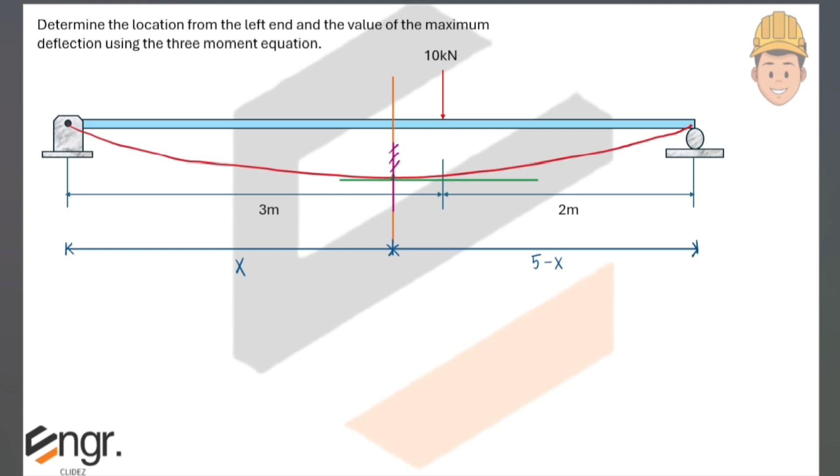So dito tayo sa gitna. Then we will draw our fixed support, sa dalawang sides. So once meron ka ng fixed support dyan, we can now divide the beam into 2. Our first beam is this half. So we will have this figure. Copy ko na lang to, and then yung kalahati lang. Ayan, ito yung resulting figure. Tapos doon naman sa kabila, copy ko lang yan ulit. Ayan, so ito yung figures natin.

And then ano yung ilalagay natin na loads? Di ba alam natin na yung distance na to is equal to x. Then essentially, this is already a cantilever beam. Dalawang cantilever beams, isa para sa left side and isa naman para sa right side. So ano yung magiging loads? Ito, this will be the reaction at the left end. Tapos ito naman yung fixed end. Di ba kapag fixed end, then 3-moment equation, we have to draw our imaginary span.

So we will establish our points as the following. Yung location ng hinge support, label natin as point 1. Then yung location ng fixed end is point 2. And the imaginary span is at point 3. Then this side naman, the imaginary span will still be point 3. Tas yung fixed support is point 4. Then the location of the roller support is our 5th point. So dito sa left side, analyze points 1, 2, 3. Then dito naman sa right side, yung points 3, 4, 5 naman. So yung length ng right side is equal to 5 minus x.

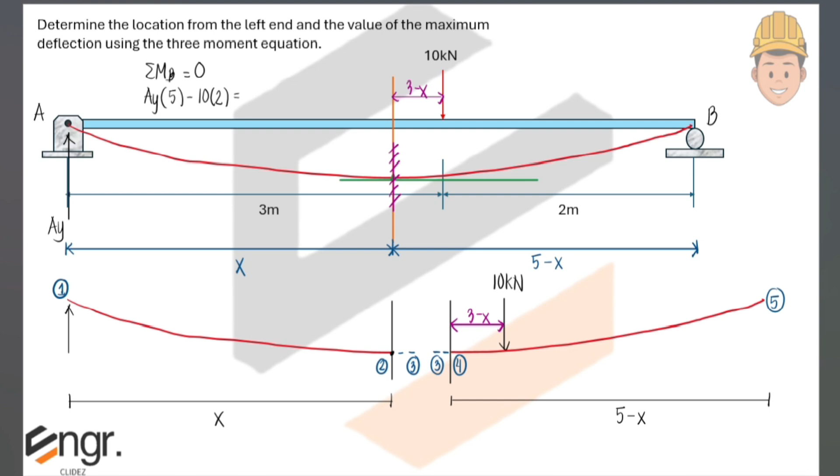So dito sa first figure, we have only this load, and this load comes from the reaction of the hinge support. So kapag isosolve natin yung reaction dyan, we can sum up moments about point B. Sabihin natin ito yung point A, ito naman yung point B. So moment tayo sa B, we have AY times the moment arm, 5 meters, tapos minus 10 times the moment arm ng 10 kN patungo sa point B, which is 2 meters, equate to 0. So AY is equal to 4 kilonewtons. So dun sa kabila, BY equals 6, from 10 minus 4.

So lagay natin yung load, we have 4 kilonewtons. Then we will now apply the 3-moment equation. So since ito yung location ng maximum deflection, we can define this vertical distance as the maximum deflection. And I hope agree lang na if we project a line dyan sa free end going to the point of maximum deflection, this distance will be equal to the maximum deflection.

Ayan. Same din doon sa kabila. If we project a line from point 5, then this distance will be equal also to the maximum deflection. Lagay na lang natin sa gitna. So again, this will be equal to the maximum deflection.

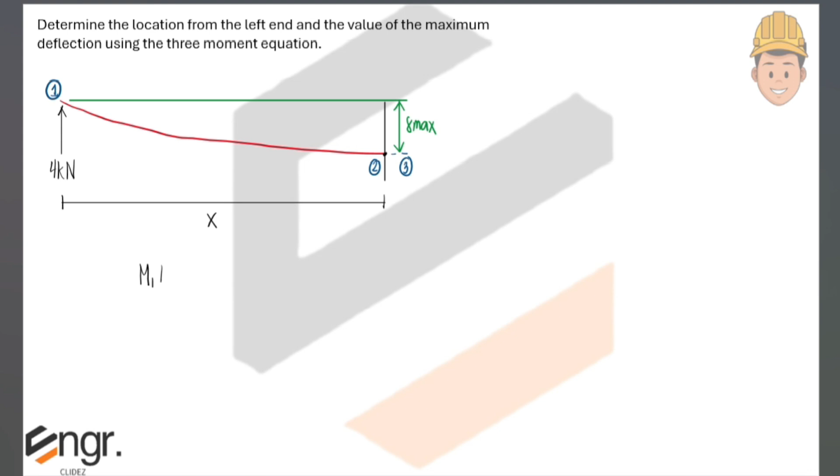Then using the 3-moment equation, we have M1 L1 plus 2M2 (L1 plus L2), then plus M3 L2, for constant EI ito, then plus 6A1 barred a1 divided by L1 plus 6A2 barred b2 divided by L2. Then we equate this to 6EI multiplied by h1 over L1 plus h3 divided by L2.

So let's identify M1. Yung M1 is the free end of the beam, so this will automatically be 0. So magka-cancel na yan. Then our point 2 naman is the moment at the fixed support. So upon establishing equilibrium, if this is 4 kN upward, then dito sa fixed support, we will have a reactive force of 4 kilonewtons. Then ano naman yung moment dyan? Yung moment dyan would be equal to opposite of the moment caused by the 4 kN load.

So 4 kN times x, this will cause a clockwise rotation about the fixed support. So 4 times x, opposite niyan is counterclockwise. Yan yung magiging moment dito. So clockwise moment, opposite of clockwise is counterclockwise. So we have a counterclockwise moment, and the value is equal to 4x.

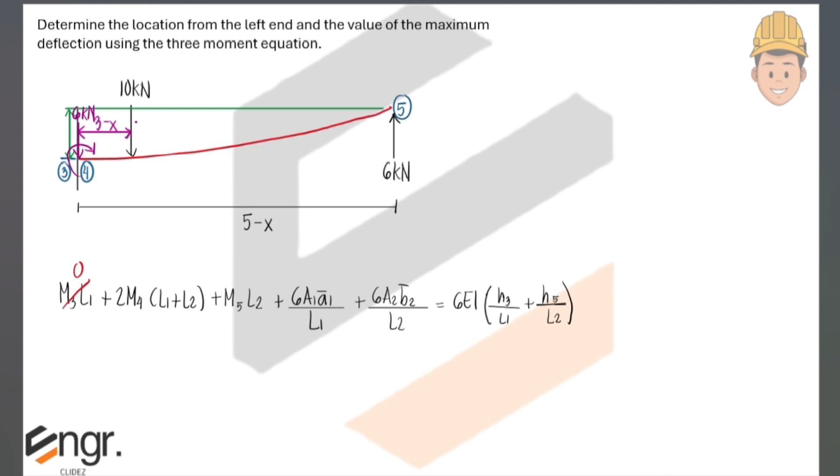Then, this will cause a counterclockwise rotation about this point. So, yung reaction dyan will be clockwise, dito sa left end. So, this will be the value of the load multiplied by the moment arm. So, 6 multiplied by 5 minus X. Then, direction is clockwise. Then, nasa left end yan ng beam.

So, let's check if it follows the positive effect. For the positive effect, the left end moment should be clockwise. Then, this is also clockwise, meaning nasa positive effect siya. So, the sign for M4 will be positive din.

So, paano naman sir if this is counterclockwise? Kapag counterclockwise yan, we follow the negative effect wherein ito yung general figure niya. Counterclockwise moment sa left end and clockwise moment sa right end. If this is the case, then we use a negative sign para sa M.

So again, M4 is 6 multiplied by 5 minus x. Then L1 will be the length of the first span from point 3 to point 4. Imaginary yan, so this will just cancel. Tapos yung L2 naman will be the length of the second span from point 4 to point 5, which is 5 minus x.

Then M5 is located at the free end. So kapag nasa free end yan, the moment will just be equal to 0. So this term will cancel. Then 6A1 a-bar over L1 is located sa imaginary span. So this term will also cancel. Now, from point 4 to point 5, ito yung merong value since merong 6A2 b-bar over L2. So, meron tayong general formula para dyan for point loads.

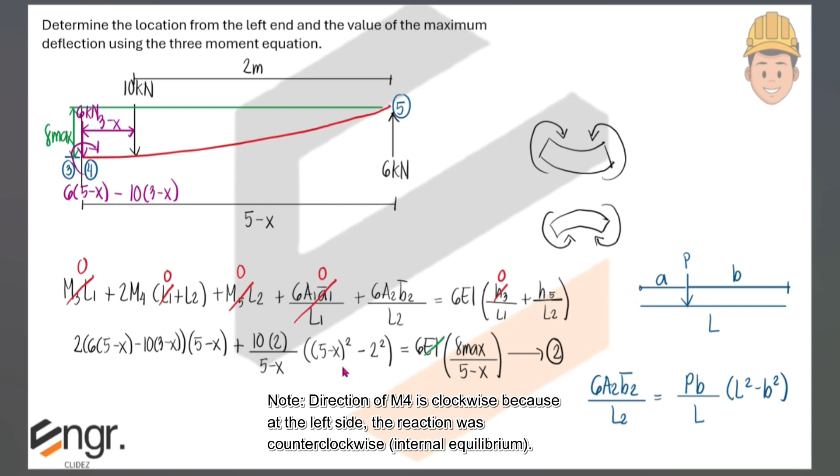So, balik tayo sa first equation natin. So, since alam natin na sa second equation, deflection maximum occurs only sa isang instance, we just need to define the maximum deflection in terms of x. So, 2 times 4 will be 8. Then, x multiplied by x is x squared. Then, we have equals 6. Again, yung EI magka-cancel dyan.

And, it cancels with the second equation. I mean, not necessarily cancel. Tatanggalin ko na lang. But once we solve the equation, we just need to treat EI as constant. So, parang ano lang, 1. So, hindi na natin itatype yan sa calculator. So, 6 multiplied by deflection maximum divided by x.

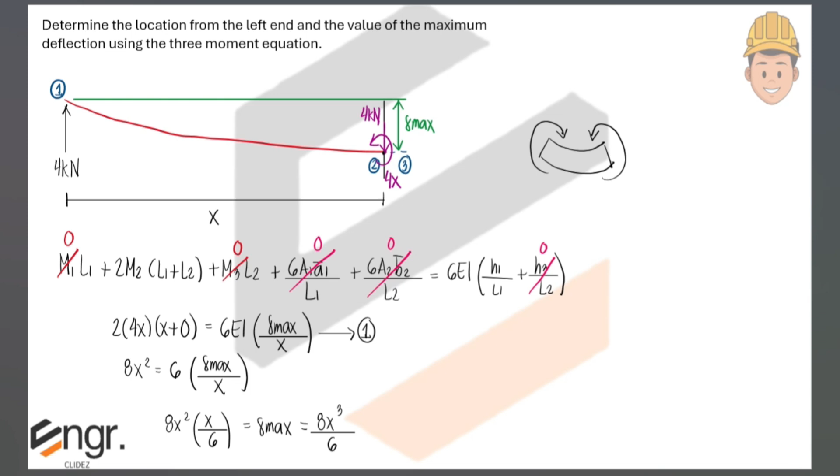Then, multiplying the reciprocal of 6 over x dito sa kabila, we would have 8x squared multiplied by x over 6. So, this is our maximum deflection. If we simplify further, x squared multiplied by x is x cubed. So, 8x cubed divided by 6. Ayan. So, yung gagawin na lang natin ngayon is, ikakopy natin yung equation 2. Then, just replace delta max. So, yung delta max will be equal to this value, 8x cubed over 6.

So, input na lang natin yan sa calculators natin. Ito na yan. And then, once you press shift solve, assume a value na realistic. Since yung assumption natin is, andito siya, just to the left of the 10 kN load, this is 3 meters. Kalahati ng 3 is 1.5. So, yan yung safest guess mo. So for x, 1.5 is our guess value. Then, press equals. We will obtain 2.645751311. So, this is already the location of the maximum deflection.

So, lagay natin x is equal to 2.645751311. Ayan. Meters yan. Location of the maximum deflection. Then, for the value of the maximum deflection, just utilize this equation, yung na-simplify natin sa equation 1, 8x cubed over 6. So, yung x, isa-store ko na lang, shift store, lagay ko sa letter A. So, 8x cubed will be 8A cubed divided by 6.

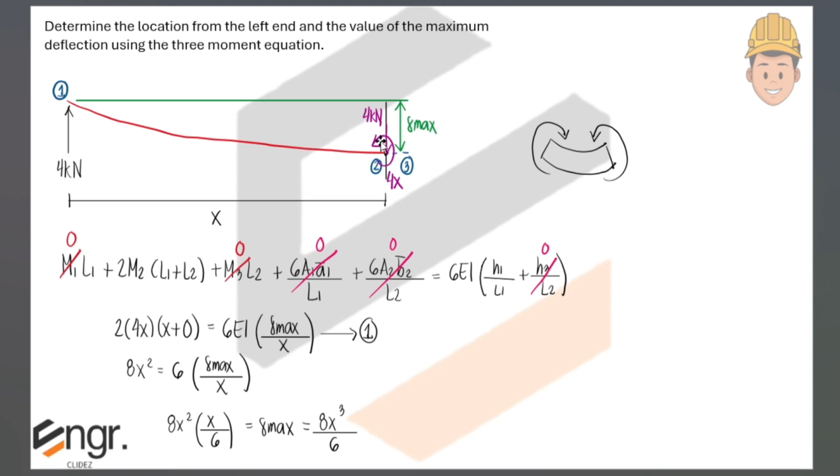Now, itong equation na binuo natin, actually, pinakita ko lang yung M4 in terms of the second figure talaga. But using the concept na yung moment dyan is just same as the internal moment dito sa left side, and we know M2 is equal to 4x, we can also assume na itong value ng M4 is 4x din. 4x yung M2 at the fixed support, diba? Same location yan. So, dito sa second equation, instead of writing M4 as this long expression, we can just use 4x.

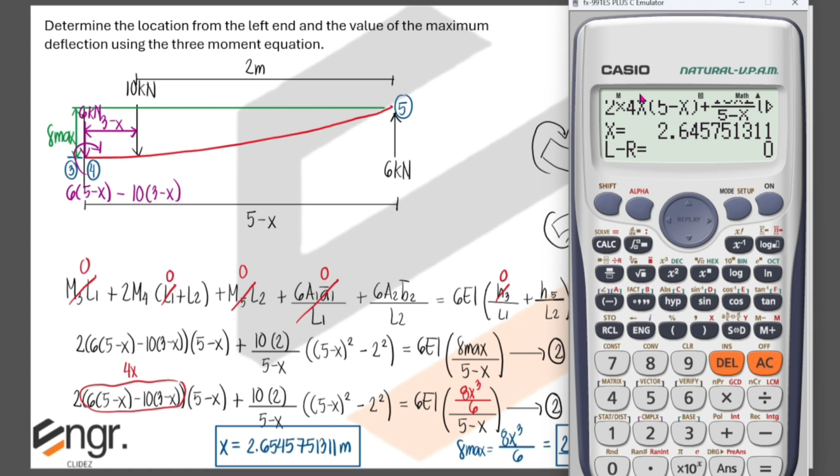So, hindi ko na lang i-demonstrate ulit. Tinype ko na lang sa calculator. Ito. Instead of writing 6 multiplied by 5 minus x minus 10 multiplied by 3 minus x, this will just simplify into 4x. So, if you will input 2 multiplied by 4x, then multiplied by 5 minus x, bali ito. Palitan mo lang yan. Make this 4x. Same result pa rin. Shift solve, solving x, 2.64575 pa rin. Ayan. So, ito talaga yung best option.

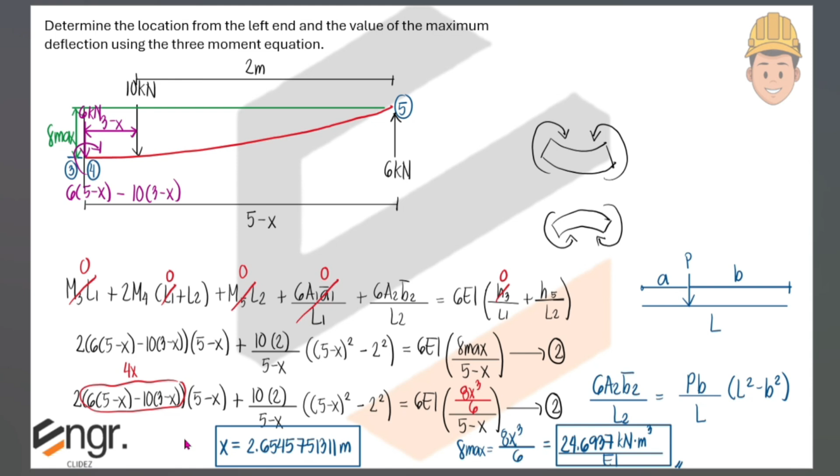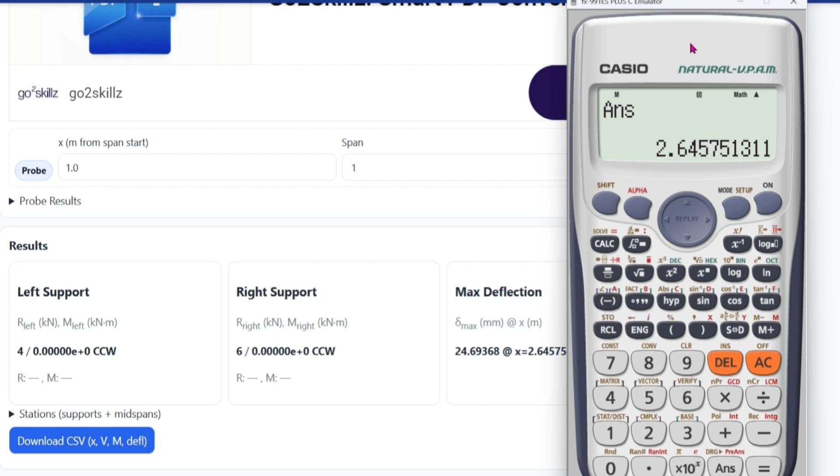Instead of using this moment expression, just use the moment at the left side. Same lang yan sa magiging moment mo dito. So, if we will check dito sa application natin, the location of the maximum deflection is at 2.64575. Recall A. Ayan. 2.64575. Then, yung value ng maximum deflection is 24.69368. Ayan. Ito pala yung input values doon sa application natin.

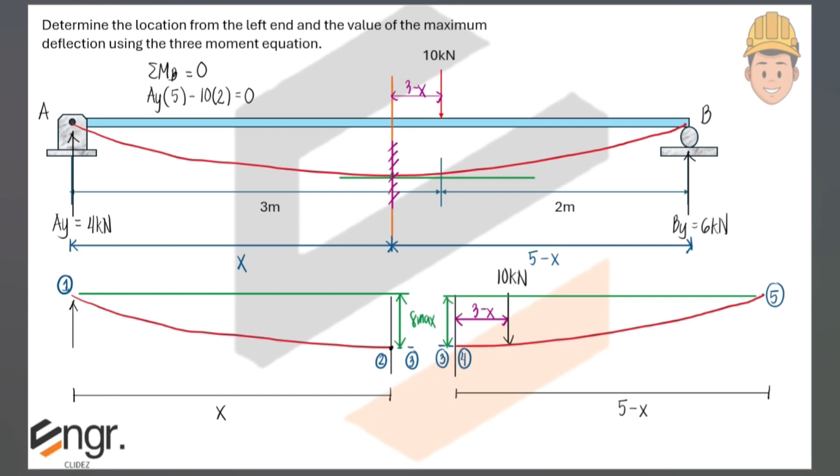So, marami nagsasabi na hindi pwedeng makuha yung location ng maximum deflection using the 3-moment equation. But by using the following concepts, we can still obtain the location as well as the value. But yun nga lang, medyo mahaba siya. Medyo mahaba but doable. Pero hindi to recommended sa board exam or sa quizzes ninyo. This is just to explore further the concept sa structural theory na pwede rin palang isolve siya gamit yung 3-moment equation.